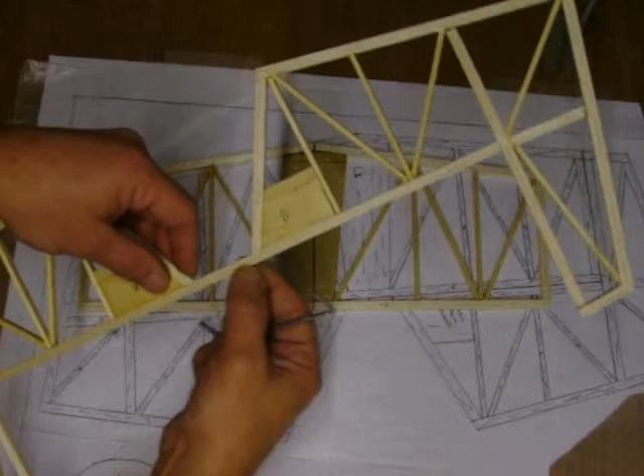Don't worry about the joiner wire, I'll get into that in a second. You could use a dowel if you don't have a joiner wire. But the first tool that I have here that's a pretty cool thing is a center marker. Basically you just put this on the thing and slide it right down, and that will give you a center line across your whole piece of wood, which is a very nice thing.

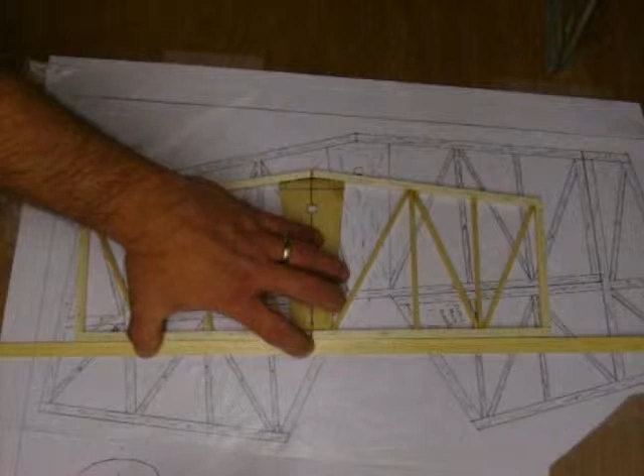Now if you don't have one of these cool little doohickeys, this is a quarter piece, so I'm going to use 3/32. You can take your 3/32 piece of wood and put that down, and then just take your marker and mark it. Now half of a quarter of course is an eighth, but when you put your 3/32 down and mark it on here, that will come out to an eighth.

If you use an eighth, then you'll be too high with the mark because you can't get right into the line where the eighth actually is. So 3/32 works pretty good for that with your pencil if you want to mark it off that way. And you don't need a whole big piece. We're going to put basically 4 hinges in here, so you can just mark the centers of where the hinges are going to go.

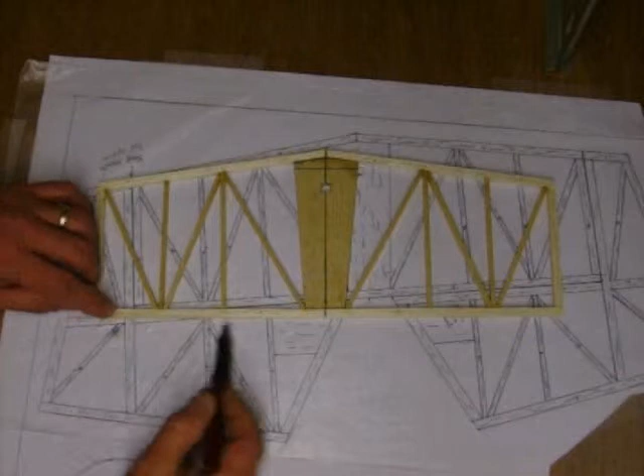And also for the joiner wire, we're going to put everything together and we're going to get the centers on everything. I'll show you what's going on with that. But your joiner wire here just joins your elevators together. Once we get this all marked out, then we'll go ahead and drill holes and put that in, and that's what's going to make your elevator go up and down.

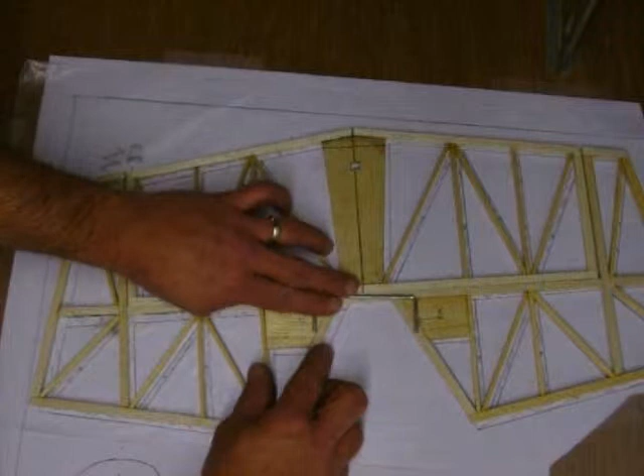But we'll put this in here, and then we're going to cut this center piece of wood right out of here, because that's the way it is on the plan. Now if you don't have a joiner wire, you can use a wood dowel. Hopefully you got some for where you're going to join your wing, but you're only going to need about 2.5 to 3 inches for your wing, and that's all you're going to use your dowel for.

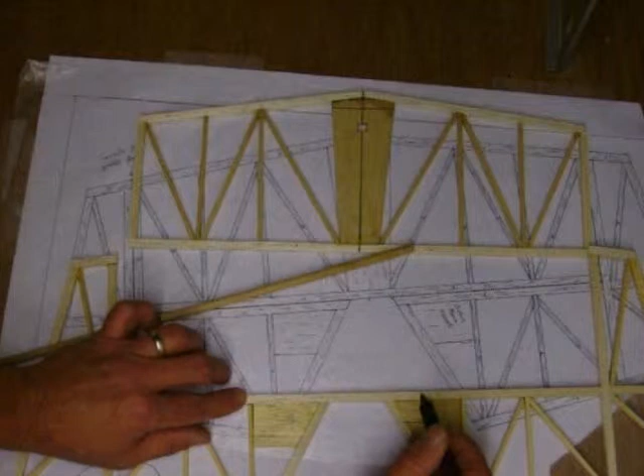So we can also use the dowel in here in place of a joiner wire, and all you would do is find your center here. I'll show you both methods. Mark your center down here, mark your center on your dowel after you figure out about how much we're going to use. Probably just a little less than half. So we'll mark that here and here, and then we'll cut this whole piece of wood out from here to here, and then you just put the dowel in there, and that'll hold everything nice and straight.

The biggest thing is to make sure that the elevators stay nice and flat, whether you're using the joiner wire or the dowel, because when this moves, you want the whole piece to move as one. You don't want one end to be higher or lower than the other. So this is kind of a precise thing. The wood dowel is probably the easiest because you can lay things flat and keep everything solid, and then just epoxy this wood dowel right in here. As long as you got everything flat, that's the way it's going to dry.

When you're using a joiner, we're going to have to drill through, and you're going to want to make sure that your joiner sits nice and flat as well. And if it sits flat right from there, then you should have no problems regardless of how you drill. Just got to make it straight, that's all. And I'll show you some tips about that as we go.